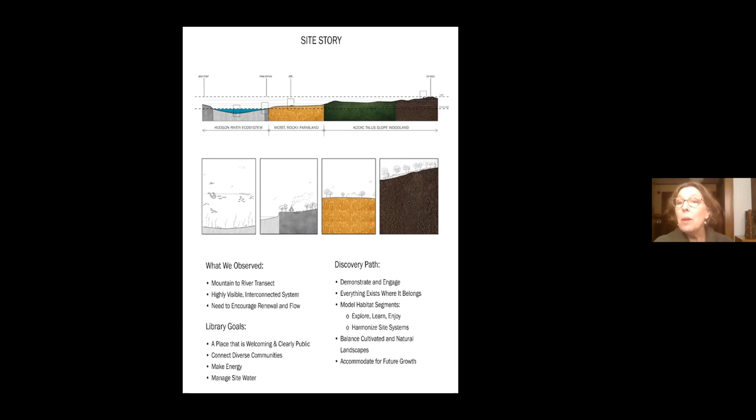To do that, we wanted to model habitat segments for learning and exploration and to harmonize site systems. We want to balance cultivated and natural landscapes and accommodate for future growth of the library, sometime down the road, though we don't know when that is.

To get to that final Discovery Path solution, as Jen mentioned, we ended up developing three concepts that we presented to the public at the final public meeting. The concepts worked around different ways to organize the program components, or the uses, on the site.

You'll see in these 3 diagrams, which I won't go into too deeply, that the same components—a solar array, a path around the site, moments to engage in outdoor activities—all find a different diagram or relationship in each of these proposals that we put out there.

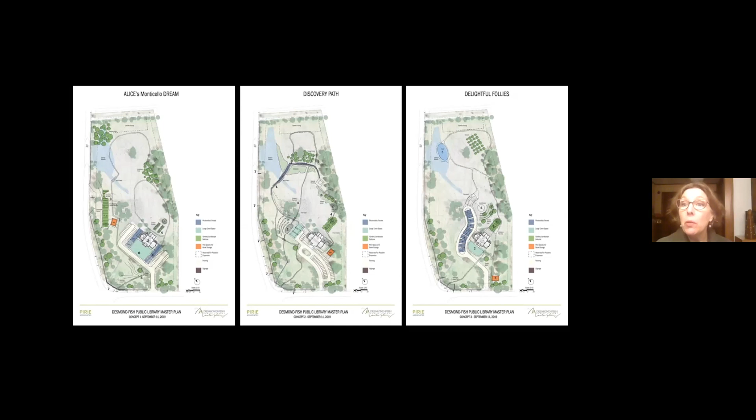It was a lot of fun to have the community members at the library evaluating and giving their opinions and input on the final schemes. Most of the people there that night had been there throughout the process, and they could see their ideas and suggestions from the previous two meetings come to life in the final propositions.

So we did ranking, evaluations and discussions, and people noted their favorite scheme with stars and numbers. With this public input in combination with the library's internal goals, we landed on the discovery path as the preferred solution. So here's the complete site plan.

As Jen mentioned, this is a master site plan, so it's looking to the future. It doesn't mean all of this is going to be implemented at one time. The purpose of a master plan is to look some distance out and anticipate where activities may happen, so that as incremental implementation occurs, we don't put something where we want something else, or put something in a place that precludes a better solution down the road. The idea of conceptualizing the entire site is not to build it at one point, but to make a proposition that can be implemented over time.

As we look at the entire site plan, it takes advantage of an emerging wetland up here in the northeasterly corner. Route 9D goes along this edge, and the building is in the center. As a result of the construction of 9D and other topographical characteristics, there's an emerging wetland on the site.

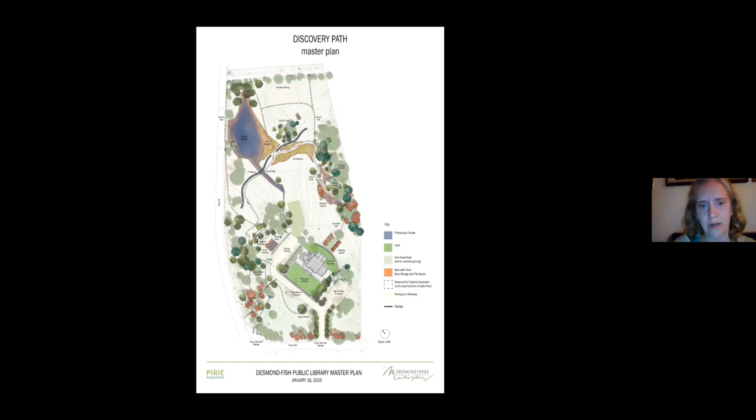Jen, I don't know if you want to speak to your meeting with the Conservation Board, as we're introducing the concept here. Yeah, we did meet with the Conservation Board—they came to visit the site and look at where the solar was proposed. They approved a permit for this project specifically, with the caveat that we plant some native plants to offset the work being done across that small section of the emergent wetlands. So we're planning to work with the Audubon Constitution Marsh folks to make recommendations for native plantings along that stream.

So the library is here, and the idea of the discovery path is that along the path—I'm marking the edge here with the cursor—throughout this kind of loop that would exist around the site, one could travel through different microhabitats around the site.

The first being a pollinator garden along this dense edge, which provides nice privacy to an adjacent neighbor, with small moments for stopping or reflection along the path. A dry meadow landscape uses grasses and other plants appropriate to that setting. There's an emerging young forest here to demonstrate tree succession—we want to show what a young forest looks like, what a mature forest looks like, and what a cycling forest looks like on the site.

Then as we cross along this area, the path moves near the wetland and merges into a wet meadow with a series of native plants and grasses found in that landscape. Around close to the front edge, it comes into a woodland landscape, and then back to a more cultivated landscape around the library building itself.

Behind the library building, there's a desire for a reading garden—a slightly more formal landscape configuration, like an outdoor reading room. So those components along the discovery path organize the entire site.

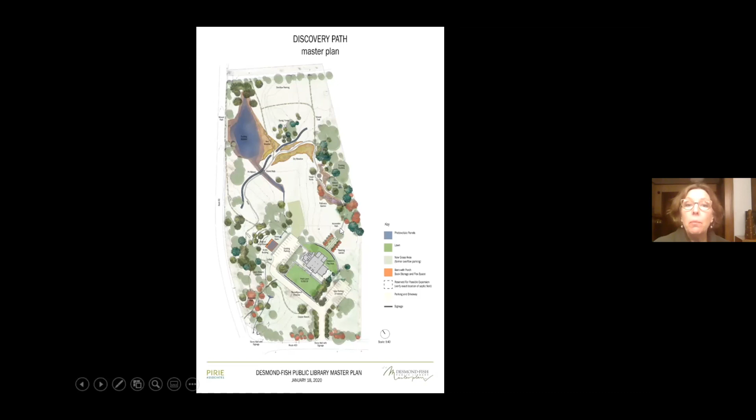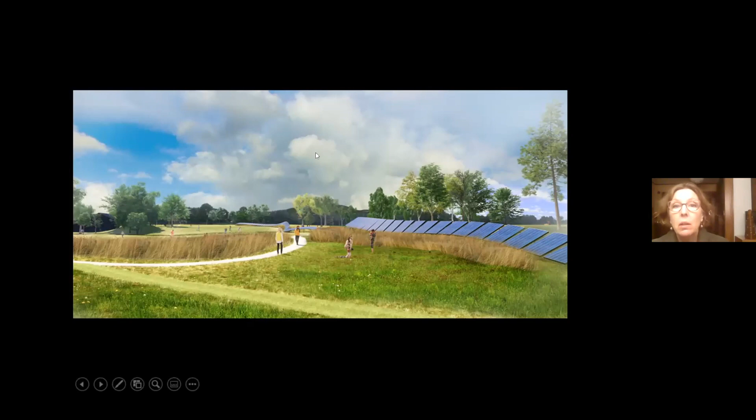So those are the three components: the reading garden, the discovery path, and the solar array that are part of this application. Here's an image we created, standing looking at this location as the path, the discovery path, bends around, and you can see the solar array to your right. So this is the discovery path bending around.

As I mentioned, it's a stone dust path on a supported subbase, about 3 feet wide, about 6 inches deep. These are the plantings of the natural grasses. Portions of them will be able to be grown long, and other parts of the lawn area that we know is open will be mown. You can see the beginning of the emerging young forest here.

The array floats lightly over the landscape, feeling like it's a ribbon blowing in the wind. We felt that was a delicate, light touch way to touch the ground, but also creates an artful and demonstrative form in the landscape. And if you look over to the left, you can see just beyond here is where the library would be, and here's the profile of the mountains across the river.

So focusing in on two of the three areas, the reading garden we spoke about quickly. This is the wetland landscape, so you can see a sketch of a similar view I just showed you, with the library in the background, the dry grasses, the wetland grasses around. This is the solar ribbon itself here. The path comes along the front of it. There's a small footbridge that goes across a wetland area, and the plantings in this area, on the whole site, are actually meant to be native plantings.

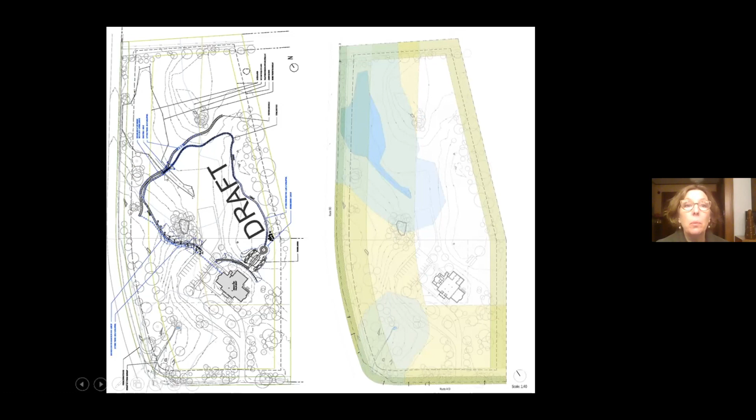From a practical level, as we know on this site, this toned line here represents the scenic protection overlay of the site. Here's the library building itself. There are several other setbacks noted here. This is an excerpt of the plan that was submitted, so we can see the plan here. This is that partial retaining wall along which the accessible grade path is set up. This is the reading garden itself. This is the final configuration of the discovery path at this time, a portion of it. And then here's the solar ribbon array at this point, and then the footbridge is here.

A few practical considerations: the area of disturbance of the project. Although it covers a large area, the actual area of disturbance for each portion of the project is fairly limited. The area of disturbance for the reading garden, behind the library, because we had to regrade it for accessibility and create planting beds, was 7,000 square feet of planting beds and garden elements, low retaining walls, benches, paths. The solar array itself, although the array takes up area on site, the disturbance for that is very limited because it's just the pile foundations that go down into the ground.

We're planning on piles every 8 to 10 feet. So the total area of disturbance for the solar array is about 2,500 to 2,600 square feet. And then the stone dust paths and the grading for the path end up disturbing about 4,250 in total.

So the total site disturbance area for the boardwalk, the dust paths, and the grading is about 7,500 square feet. The reading garden was underway and complete, except for a few plantings in 2020, and that was about 7,000 square feet. The solar array and the walk total to just under 8,000 square feet. The two add up to about 15,000 square feet. So you can see the total work anticipated for 2020 and the total work area in 2021, each of which is less than 10,000 square feet.

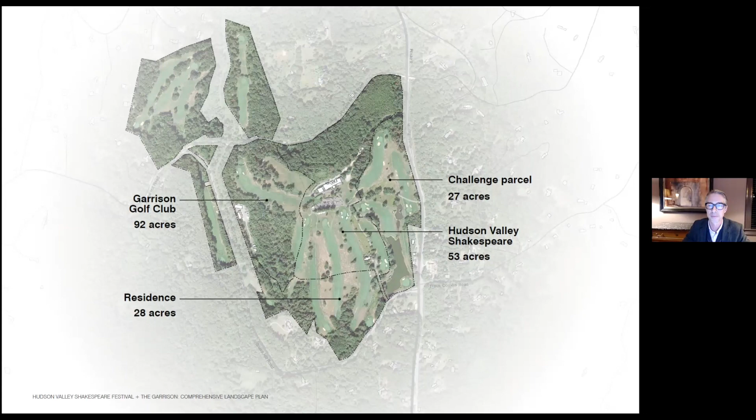I'll walk you through the plan as it has been developed over the past few months, and we'll begin off of Snake Hill Drive. I hope you can see my cursor. Just anybody, a thumb up if you can see my cursor on the lake. Thank you.

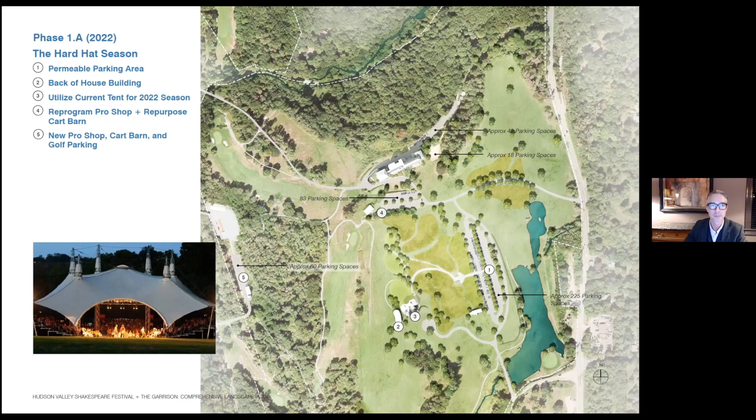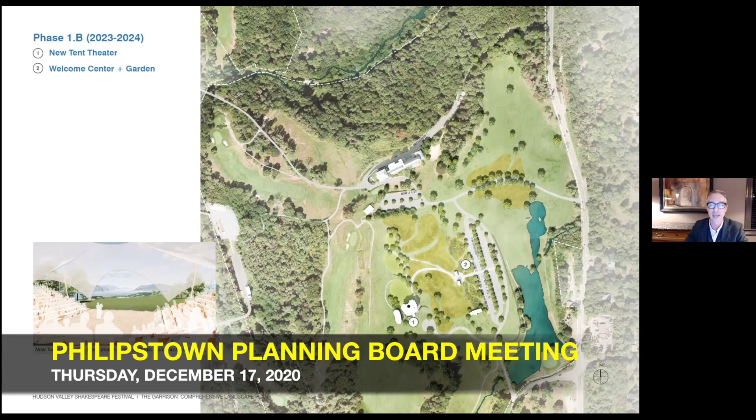Phase 1B would be the season of 2023 and 2024, and here is where the new tent designed by Studio Gang would be installed. This gatehouse structure, the welcome building or welcome center, would be built, and the welcome gardens would be complete. The existing cottage that is currently the residence for the director of the Garrison would be repurposed as administrative offices for the staff.

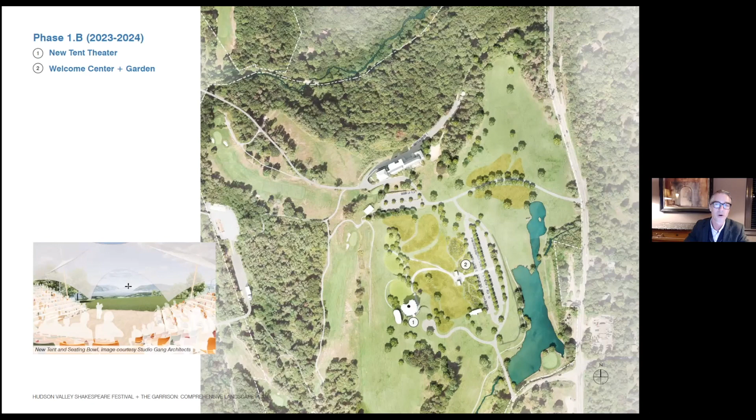Here you're seeing a rendering from Studio Gang of what the tent structure and the seating for approximately 525 people would be, focused on the view to the river.

The paths will be a mix of some hard paths for universal accessibility - for strollers, wheelchairs, people of all abilities - as well as mown paths through this warm season grass meadow, akin to the previous project at the library that you just reviewed, creating this immersion into the landscape of the Hudson Valley that is such an essential part of the magical theater experience of the Hudson Valley Shakespeare Festival.

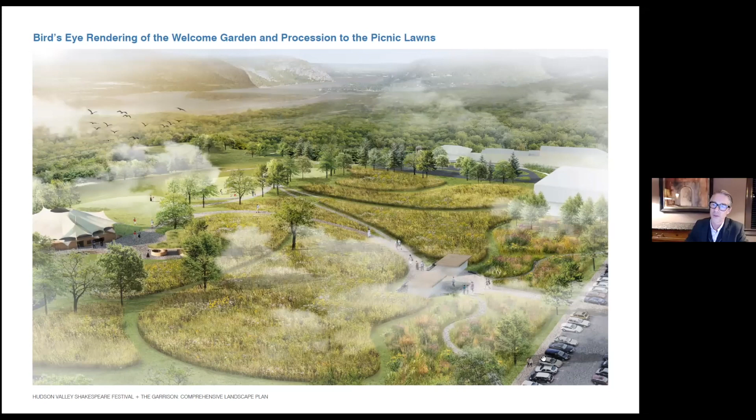This is a rendering showing the parking lot, the welcome garden here with strolling paths that all collect at the welcome building, this welcome center.

The two pavilions, perhaps - again, this is not designed and not in our first phase of construction, but I think the essential point is that this building be a welcoming threshold to your journey up the hill to the theater at the top. This is the eventual concession building with a green roof, and the back of house actors building is just to the left, off screen here, of the tent.

You can see the lawn areas we're imagining for picnicking, shade trees included, a second lawn, a very small retaining wall here that might be for pre-performance lectures where maybe some performers or the director might come and speak to the audience. And then a number of paths that create daily connectivity on this campus between the existing Garrison buildings, the eventual permanent year-round theater, and the administration.

This next visualization is looking up the three lawns toward the eventual tent, the shade trees, the rougher grasses, mown lawn in just these elliptical lawn areas, and then the open meadow in the distance. And then down at the bottom of this hill behind my cursor is where the parking lots would be.

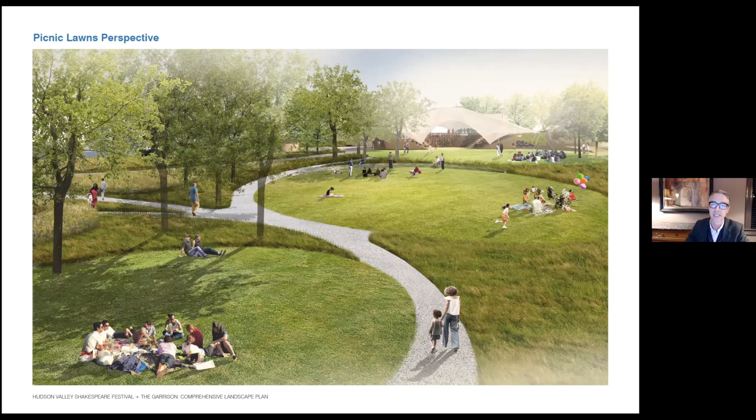This section we thought might be helpful. You can see in this cross section, this is going from the berm behind the theater that will help mitigate sound coming to the theater from the road and from the theater out to the road.

Here is the tent, the three picnic lawns, the parking lot that exists at the Garrison and down into the forest. So now going left to right, we have the existing ridge, the berm here, the surface of the tent, first lawn, second lawn, lower lawn, the meadow slope down to this outdoor community pavilion, and then the slope that exists to the reception hall at the Garrison, its service road behind, and then the hiking paths down in the rehabilitated woodland below.

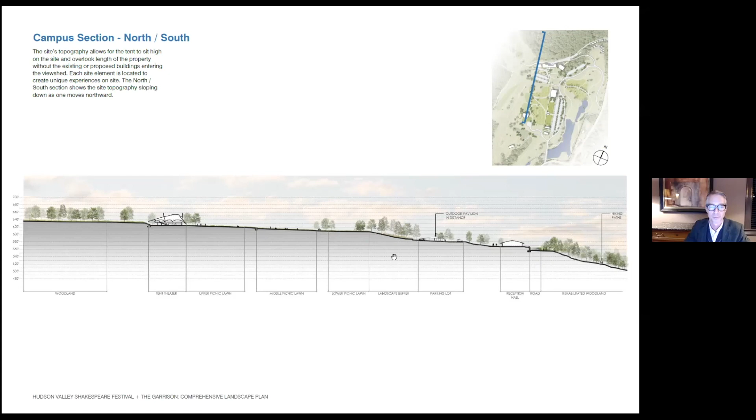So we're at a substantial distance. I mentioned before, 1,100 feet from the road.

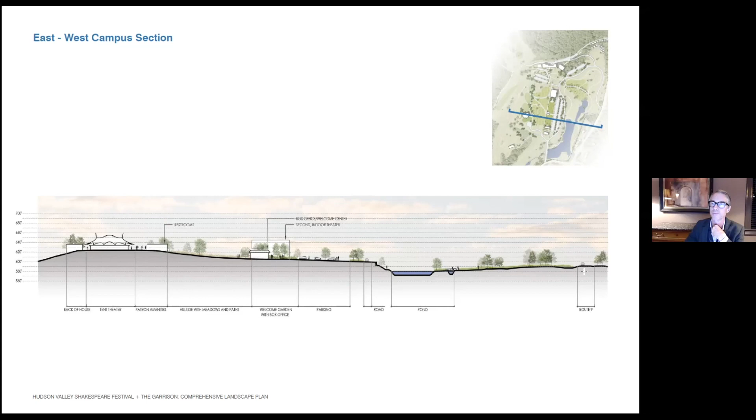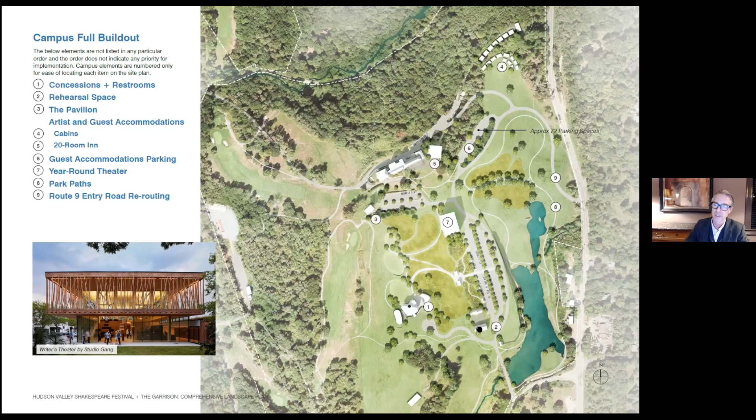In this, you're seeing the full build out that I walked you through at the beginning, but this is a chance to show you some of the ideas for one other structure that I neglected to mention, number 2, which is a proposed rehearsal structure parallel to the existing cottage that is the director's residence for the Garrison. Just south of it would be this rehearsal space.

And again, not designed yet, but the idea that it might be something like one of these kind of barn-like structures. Maybe it draws influence from agrarian structures or even the cottage itself that it would be next to, so that it really fits within the context.

And then for that community pavilion that I mentioned down near the existing hotel, a lightweight open air structure for outdoor education and community gathering.

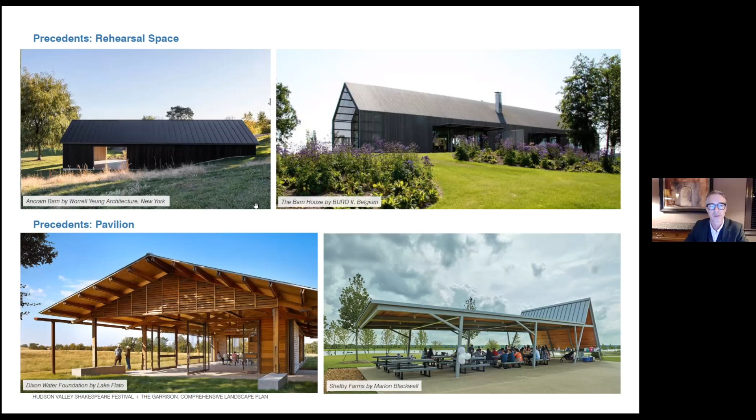So I will end there, and happy to field any questions anyone has. And Davis and Katie and Chris, if I missed anything, please add.

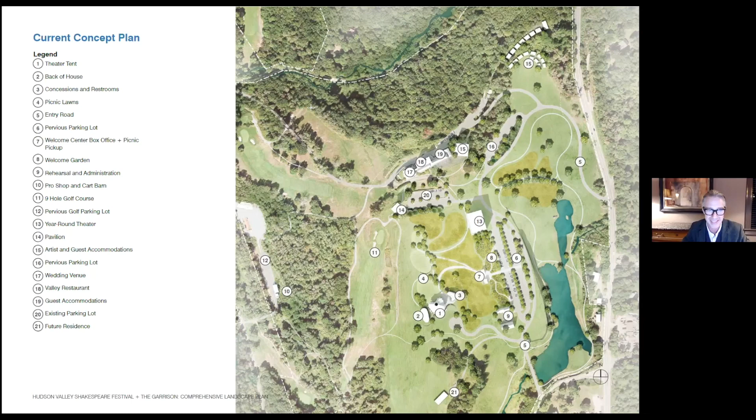Well, Thomas, before we go on, just so we know, we have many more activities to do tonight, and I'm going to ask Steve and Ron procedurally about how we handle questions this evening, both from the public and from the board, and whether we can even have a dedicated session to this topic, much like we did with Hudson Highlands Reserve, where we had a separate evening, I believe, a workshop to take community input. So we can talk about it in a second. I believe Glenn hasn't gone yet, though. So maybe we let Glenn do his thing as well.

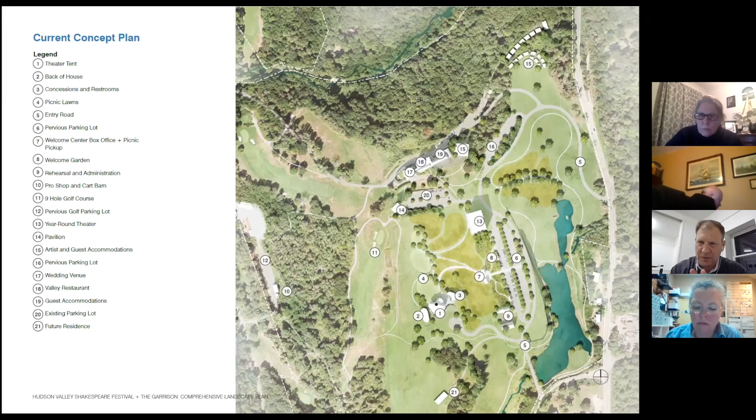Glenn, you're on mute. Okay, long red button, sorry.

I don't have an awful lot to say right now. You've gotten a pretty good overview of everything that's going on here. As I said to the town board when we met, we've had some very exciting projects, and this is right there at the top of them. You've all received Ron's memo, which gives you a history of the property, as well as walks you through the steps necessary to accomplish this, at least the regulatory steps in the different bodies. So I'm not going to say much else about that. I would ask if it might not be better to have Ron just give his couple of minutes, and then hand it off to Dan Hollis, who will actually make a request of what we would like to accomplish tonight. I'm sure Dan would only take a minute or so, and we could wrap it up.

Well, why don't we finish with the applicant going, and then we can have the staff talk. So if your colleague, Mr. Hollis, would like to speak, that's fine. Very good.

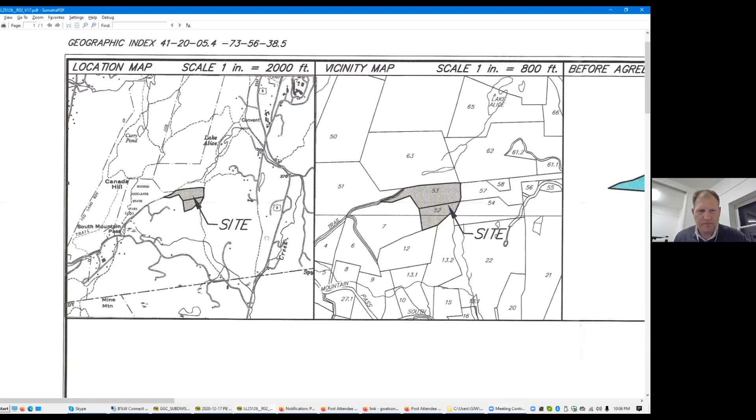I'm just going to walk you across the top of the map. On the left side, you see the location map. This dashed line that the cursor is following is the county line between Westchester and Putnam. To the right of this window, you have Route 9 going north and south. South Mountain Pass leaves Route 9 in Westchester and comes up over the mountain to South Mountain Pass Spur.

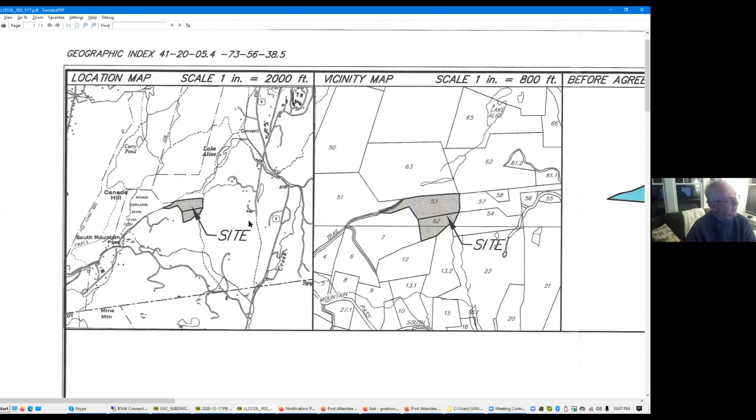It's a private road that services, at present, two lots that actually have improvements, and we have the property at the end of South Mountain Pass Spur. The next panel is the vicinity map, which is just a blow-up that shows the 2 lots that exist today at the end of South Mountain Pass Spur. Lot 53 is improved with 2 structures, 2 dwellings, and lot 52 is a vacant parcel.

The application is to take the 2 existing parcels, tax parcel 53, which has the 2 dwellings, and the vacant parcel, tax 52. The panel you're seeing now is their present configuration. Parcel 2 is a landlocked parcel recently acquired in the last couple of years. Parcel 1, the improved parcel, has been owned by the family since the early 1970s.

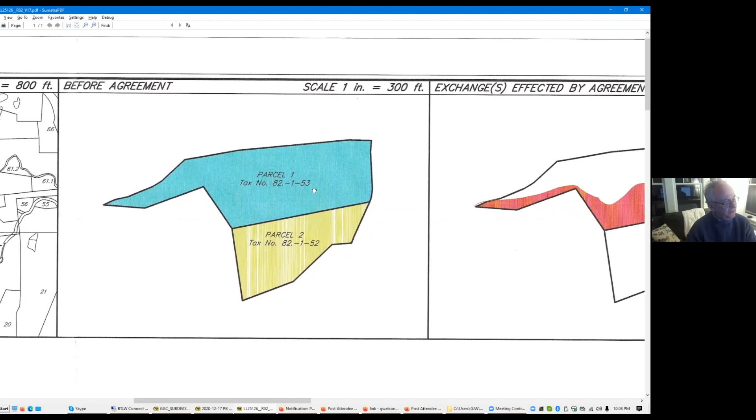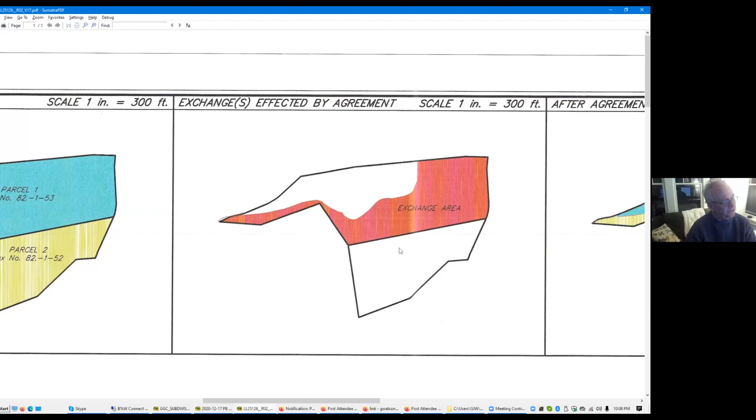The application seeks to adjust the lot line between the 2 lots such that this red area goes from being part of tax lot 53 and becomes merged with tax lot 52. That results in a configuration that looks like this. Sorry, I have to stop that.

We're in a 10-acre zone. We do not have 20 acres of ground, but we have 2 buildings. So we came before you a few months ago seeking this, and you turned us down, rightfully so, because we didn't have adequate area. There was no real practical way to configure the lots since we didn't have enough area to do it at all, and there was no way to strike any kind of balance.

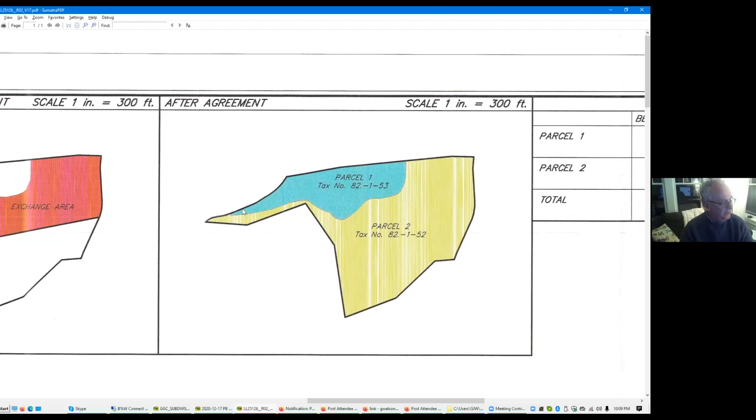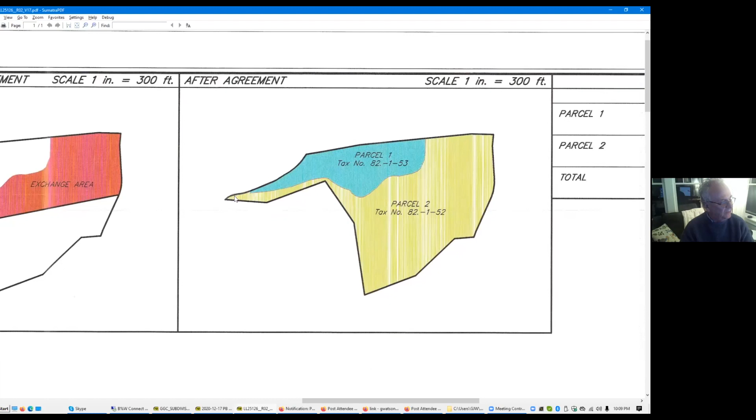But what we did do was adjust the line between the two existing houses, and provided some frontage for the second lot that today has no frontage. It created two nonconformities: one, the area of parcel 1 is now going to be less than 10 acres, getting smaller, so that was a nonconformity. And the frontage we'd be providing for lot 52 is substandard. That's the second nonconformity. You sent us off to the zoning board.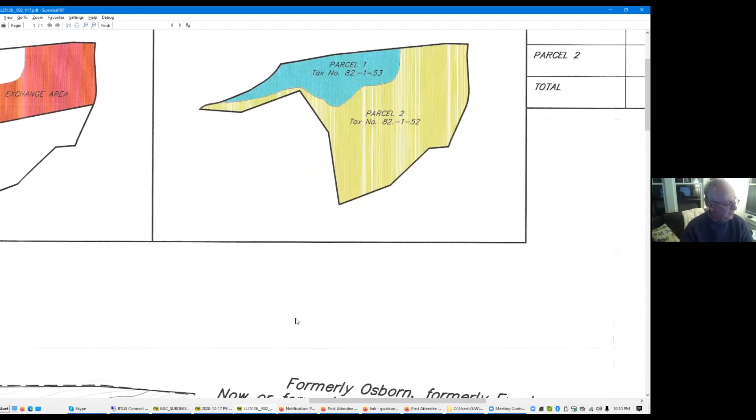The zoning board has granted us those variances, and now we have created... I'm going to try and make this go down a little bit. This is an overview of the property. This is the actual subdivision plat that you're looking at now.

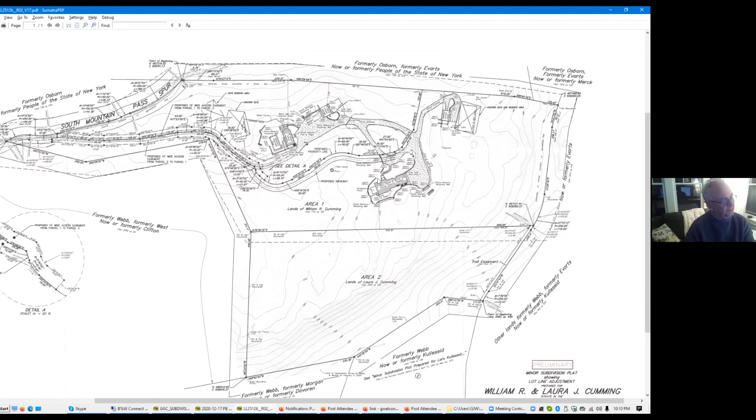So now what we did was take the division line, the proposed division line down the driveway, and then created an easement that they would share, and the two houses would branch off. Each house would be on a separate lot. Each house has its existing septic system. Each house has its existing well. We've accomplished as much as I think we can with regard to making the lots as conforming as possible.

And we did get the variances. I think we've given those to you. So now we're here seeking your approval to subdivide the properties as shown here. Okay, thank you, Glenn. Ron?

Yeah, the board has addressed all required procedural and referrals necessary. You're here tonight for the conduct of the public hearing, and that's the last statutory requirement you have prior to consideration of action on the application.

Okay, thank you. Steve, anything to add? Ron's correct, it's time to see what the public has to say. Okay, board members, questions? No? Okay, let's turn it over to the public. The public comment period begins. So please raise your hand so Kelly can let you in.

Oh, Ms. Cumming, do you want to say anything? Not at this point, okay. But happy to answer any questions. Great, Mr. Davoren, we see you. Why don't you, we got your email this morning, so I assume you want to ask your question. Go ahead sir, you're on mute.

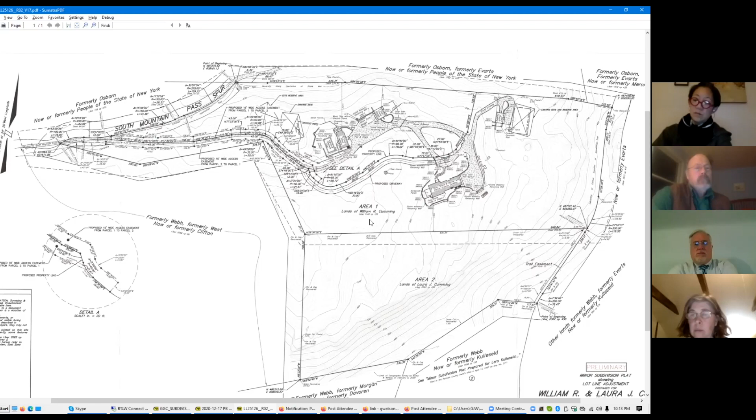The second question would be, if that were true, or if not, if it weren't true, is there any way to increase the number of lots on a common driveway through a variance of that regulation, to increase the number from 4 to something higher, because the road is so long and it has many lots on it. Is that something that we could potentially apply for after this subdivision goes through?

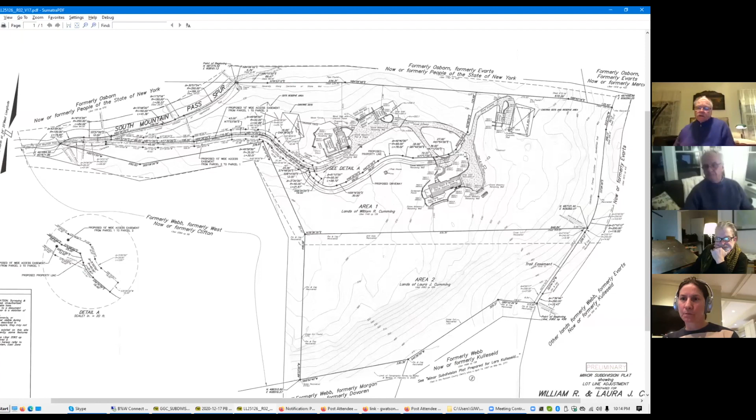So I'm going to go to Ron maybe on that one. Actually, the project itself is not changing the number of lots on the roadway at all. I mean, it's just a lot line adjustment. With respect to the permitted number of lots on the project, it actually comes back to the age of the roadway, when the road was created, and that I don't know. But that could be investigated separately if and when you ever seek to have development on your parcels.

Okay, so at that point we could apply for a variance to that regulation and do the investigation on the age of the road and the maintenance of the road, with the hope that maybe the variance to the regulation could increase the number of lots on a common driveway. Now again, the town code is such that depending on the age of when the road was originally created, it may permit additional lots without need of variance. But that investigation has to be accomplished.

It's only like up to 8 then, Ron, I believe. Right, exactly, it goes up to 8. May I address that? Sure. As Mr. Davoren points out, it's regulation, it's the land subdivision regulations, it's not the law. There's specific provision in the law for waivers to be granted to that 4-lot variance. It's happened several times over the course of my history in the town.

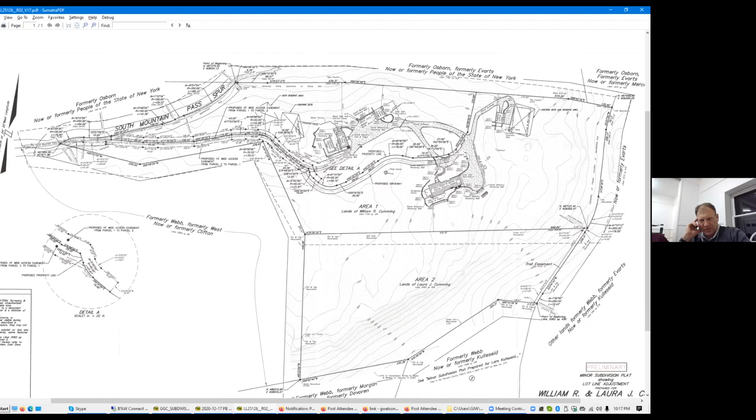All right, thanks Peter. Other questions, other comments from the public? Anyone else? Is this Mr. Clifton? Mrs. Clifton? Alex Clifton? Hello? Yes, please go ahead. I believe - I don't know if my parents are on here as well, they had wanted to ask a question. Do you see them on here? There's a Michelle Clifton on. Yes, okay, so Ms. Clifton, go ahead.

Well, just to say that I shared a similar concern to Peter Davoren, and I just wanted to say congrats to the Cummings, they've been great neighbors for a long time, and the fact that they're looking to do this subdivision for their children I think is wonderful. It made me think about the fact that we have our property up here as well, and the thought that in the future we may want to subdivide and give it to our children in a similar way. We just wanted to know if this would impact our ability to do that. We're on approximately 25 acres, and it's 10-acre zoning, so I think there's nothing that would stop us there. It was just a similar question to Mr. Davoren's, and I think my mother has a similar question. Thank you very much.

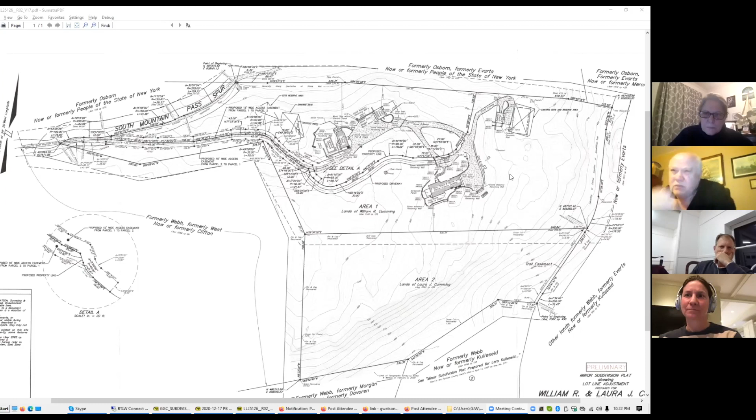Hi Michelle, it's Laura. Hi Laura, thank you. And the other question that I still don't quite understand is, if this was a property that was all one and now is being subdivided, does it stay as one on this road, or does it now take up 2 of the 4 positions available on the private road?

I think it's important for you to understand that this is not a subdivision, although it's processed as a subdivision. Hello? Keep going Steve, she's on mute because she's got some sort of echo going. Oh okay, I can't hear myself talk, so I thought I was on mute as well.

Anyway, the point is that there are 2 lots now. After this application is approved, there will still be 2 lots - they're not creating a new lot. They're just changing the boundary line between the 2 lots. So that's different than a subdivision - it would not result in an additional lot on the private roadway.

Thank you very much for the answers to our questions, and thank you for all your service to our town. Thank you, Mr. Clifton, Mrs. Clifton. Any other public comments?

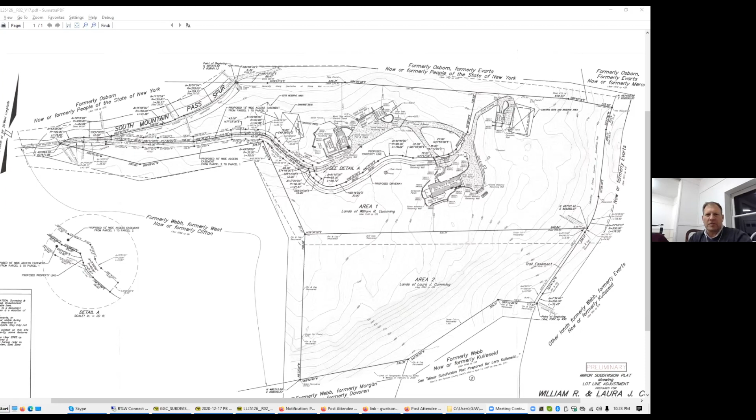Do we see anybody else, Kel? Did I lose Kelly? We have lost Kelly. Oh, there you are, Kelly. Anyone else who's raised their hand? Nobody else has raised their hand. All right, good.

Can I have a motion to close the public hearing then? Kim's motion, Peter second. All in favor, say aye. Aye. Opposed, and abstentions. Okay, thank you very much.

I do think it's valuable to state that the conversation we just had does not provide any opinion about future projects that may be applied for on that road. We're talking about this particular application right now, the Cummings. So I just want to be clear about that.

So I think we can direct Ron to provide the documentation for our next meeting to approve, if we so choose. You're on mute, Ron. I didn't realize you were waiting for me. Sure, that would be the next step in this process for the board to take that action.

Board comfortable with that? Can I have a motion to direct Ron to provide the appropriate resolutions? Thank you, Kim, for our next meeting to be signed. Okay, got double thumbs up from Kim. A second? Second. Okay, all in favor, say aye. Aye. Opposed and abstentions. All right, thank you, Ms. Cumming. Good luck. We'll see you next time to vote formally.

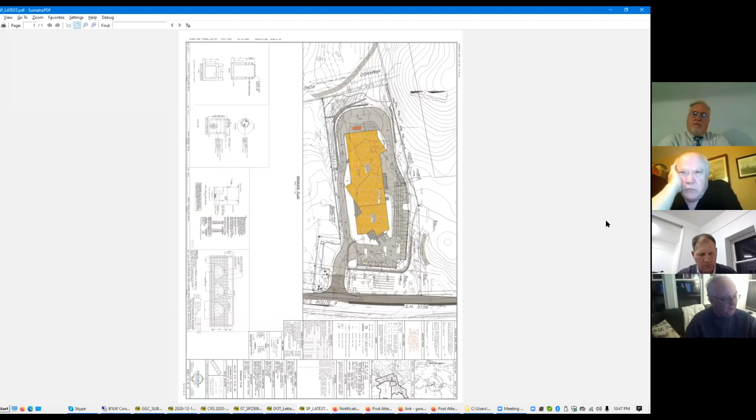The difficulty with the other site is that there's just not maneuvering room. Here we're providing the maneuvering room. So once we get off the road, we could stack far more trucks than is going to be coming into this facility. I think that should be evident, to be perfectly blunt about it.

We did look at the 2 options that DOT gave us with regard to the throat, to the entry, and there were 2 different versions. The first one that they wanted, and frankly it was their preferred version, we couldn't make work, but we did make the second one work. So we've responded to DOT in that regard.

And the last thing I'll say before I ask John to just talk about that, and I'll come back about landscaping when he's done.

Oh, I should say, with regard to the noise, we would certainly be able to post a couple of signs around the route of the trucks that said, turn your engine off, do not idle. If you wanted that, that's not an issue.

And my last point is that your normal practice, and the practice for an awfully long time, has been that your approval is subject to acquiring the DOT permit. And now we're going to have to get a DO - you're talking about reversing that. And frankly, I just don't think it's justified with all the work we've done. John, if you could take over.

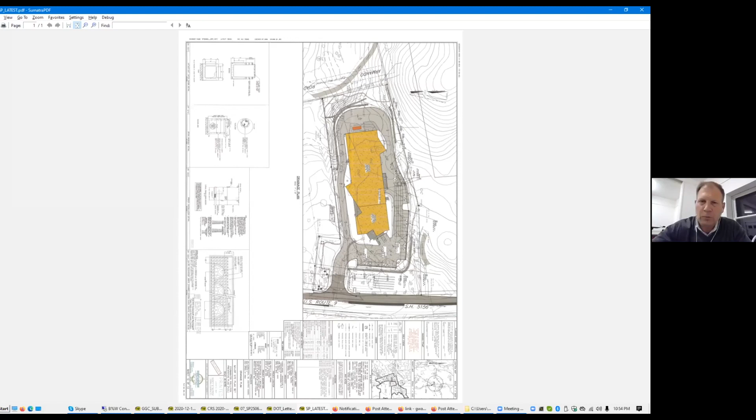So Glenn, before you go, I wanted to get the sentiment of my colleagues, and I'm going to go one by one. I'll start with Connor. So we're back to alphabetical order. Is that something people would like to see done first before we make a decision? I'm sorry, say that again? Do you want to wait for DOT input? Yes, before. Yes. Okay, Mr. Gagnon.

I'd like to get something from DOT. Mr. Lewis? I'd like to wait for it too, but DOT has a reputation of never responding to things. Maybe we should set a date. Is it possible, if DOT doesn't respond, to simply widen the mouth to 33? How long do we have to wait for those people to act?

That's not really a question for me. The point is, we wouldn't be able to have you sign any site plan unless we had that permit. So to extend the mouth, you'd have to have the permit. I know, but what I'm hearing is the sentiment of this board is that the width would provide more comfort for the operation, and with denial of the width, the board would like to think about other mitigations.

Laura? Yeah, I would like to wait as well. Heidi? Me too, yes. All right, oh sorry Neil, I apologize.

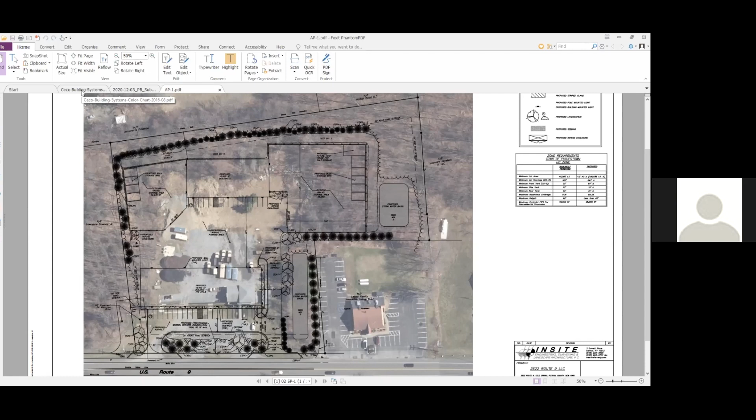And then finally, the last of the highlights since the last meeting: we've started to look at the building materials and architecture. The applicant is working with a designer on that to come up with elevations and other things. But in the meantime, we wanted to give a quick flavor of the material and color scheme being considered. This is for the use as contractor storage and office.

So this would likely be a metal building. There's also opportunities for a different kind of exterior finish, essentially an insulated foam that allows for different types of finishes on the outside. But we're primarily looking at this kind of metal type building.

Again, we're leaning into the direction of earth tones, maybe greens for a trim or something along those lines, to allow it to blend into the landscape. But those designs are in the process of being worked on now, and we'll have more detail going forward. Just to give you a sense of that.

And those are kind of the highlights, and I can get into other questions if the board has any. Ron? I guess for me, I just wonder, when will building architecturals be available?

We should be able to provide some elevations for the next meeting. So it's also a question of what specifically you're looking for. Are we specifically looking for detailed elevations? Are we looking for floor plans? How...

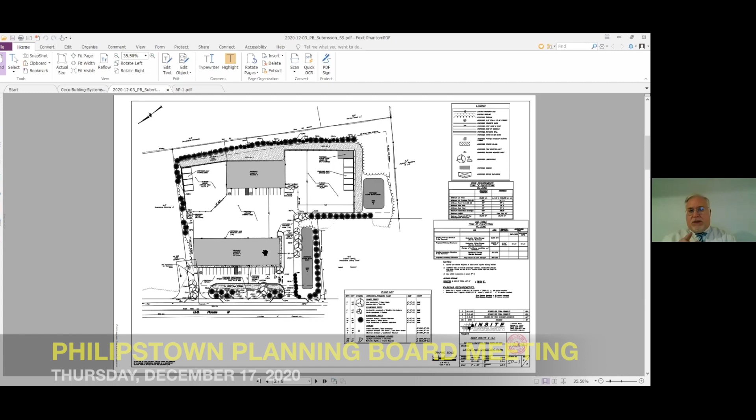Steve, I think you're looking at potential significant changes to this plan. We're talking about moving the parking spaces, among other things. I really think, look, it's the board's decision, as Ron rightly says. But given the way the board's treated applications like this in the past, you're probably going to want to see a further submission before you schedule. I think that's fair.

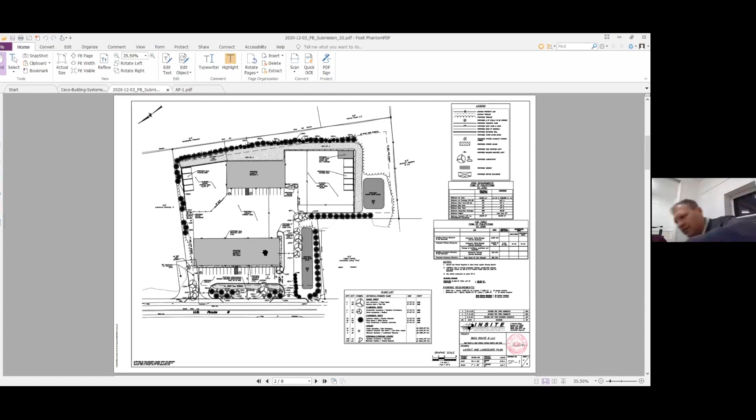Board questions? From the board? I have a question. Go ahead, Kim. Can you hear me? Yes. Okay.

So I'm trying to understand how only 59.3% of this lot is impervious surface. I'm trying to understand what counts as impervious surface and what doesn't, because it seems to me this lot is, as we've talked about paving and things like that in the past, those are impervious surfaces.

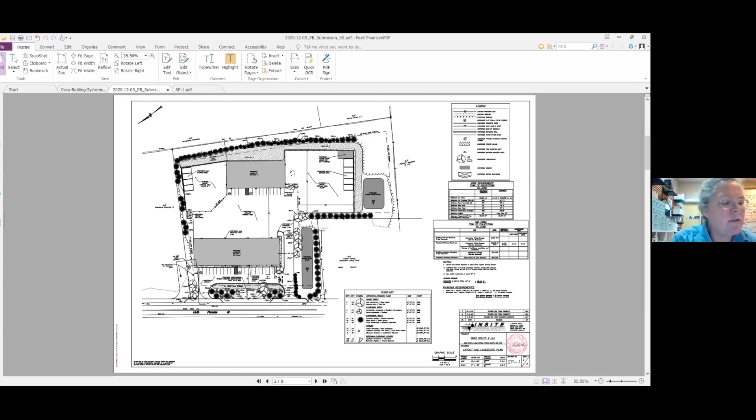The second question is for storage. It says in the code that outside storage on properties in the highway, commercial, or HC district should not exceed 20% of the lot area located in the district. Now, I don't know if the outside storage you have marked here is more than 20%, but it looks pretty big.

And then the third question has to do with this stormwater basin. I'd really like to know what that's going to look like. Is it going to be a big pit full of riprap? I'd like some detail, actually, because it's very large, and I'd just like to know what it is.

And additionally, we'd like to be sure that the trees you're planting will screen everything within 5 years. And then there's also the requirement about screening for outside storage not exceeding the height of that storage. So those are my questions.

Okay, let me try and take those in order. I don't know if I wrote them down in order, but I'll hit on all of those. In regard to the outdoor storage, yes, this is under the 20% threshold. We're at about 39,000 square feet of storage, which is a bit under 20% of the total lot area. So we do meet that requirement.

Then in regard to the height, we are showing screening to the adjacent properties. These are specified to go in at 8 to 10 feet. These are mostly spruces, which grow pretty quickly, so you'll pick up a foot or so a year. So yes, these will fill in nicely, and will be tall trees at maturity.

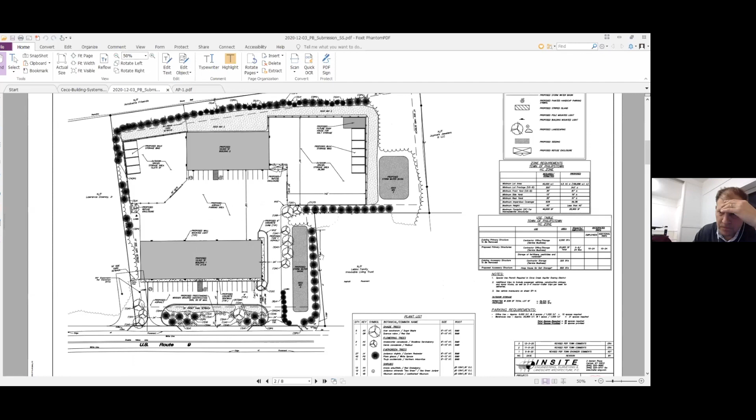All right, so it's very late. It sounds like the applicant's going to do another turn and get back to us in January. Is that correct? Yeah, I mean...

I would seek just a little bit more guidance, maybe from the board, on the level of interest in seeing these parking spaces move. We've shown more than the required landscape buffer. We're happy to move them, but it wasn't something that was in the plans until that suggestion was just made, and it's something we could certainly look at, but just maybe a little bit more input on what exactly you'd be looking for in regard to that.

I think it sounds like it was a suggestion Ron had. It might be worthwhile to see it. Clearly, our code does ask for as much screening as possible for non-retail businesses. So I don't know, other thoughts on this?

Peter asked: if we were to move the parking to the back side of the building, would that mean the truck loading would move to the front? No, no, no. We could actually move the parking to the back and still maintain the integrity of the front.

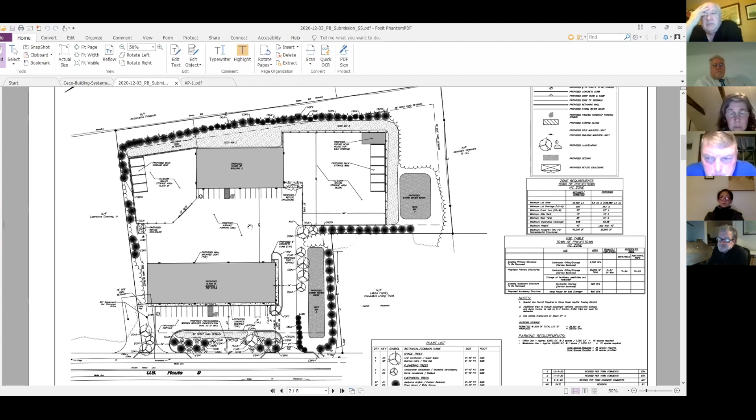Okay, Heidi, are you off mute? Heidi, you have a question? Yeah, I just wanted to follow up on a question Kim had at the site visit — it might be answered on the plan, but I can't see the writing too well. I know Kim had asked whether in the area where the salt and other chemicals are being stored, originally the hoop house area, whether that could have an impermeable floor to make sure that's happening now.

Yes, that would be on a concrete slab. That's a requirement of your code. Okay, I thought there was an issue that the area where the chemicals were being stored did not seem particularly — so I just want to clarify the language.

So the hoop house that we've shown as a potential future installation would essentially be the enclosure that could potentially be used, not necessarily, but could potentially be used for salt storage for such a contractor doing what we're seeing a lot of today. Any of the chemical storage, herbicides, pesticides and the like, that a landscape contractor might need to store, would be stored internal to the buildings with storage practices that meet whatever regulations are required. So those items would not be stored outside. The rest of the storage in this area would be for typical construction materials, stone, things like that.

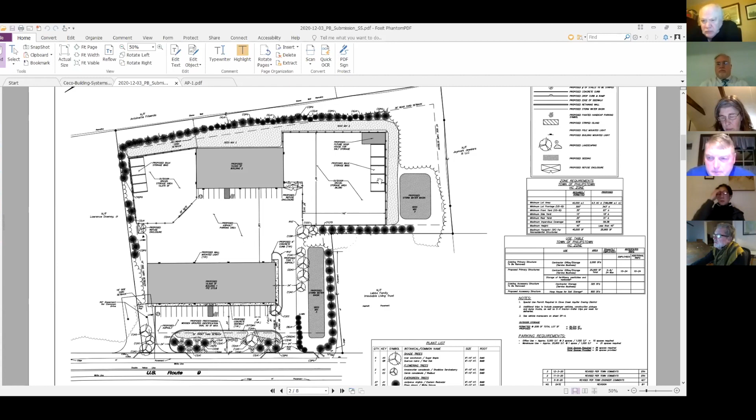Mr. Thyber, do you have what you need? Yeah, I think so. I may want to reach out to Mr. Gaynor if that is permissible. Absolutely, in the interim. Your applicant is paying fees for access to Ron, et cetera. Ron or Steve, other things you want to add? No, I think it's pretty straightforward at this point. We'll take it up in January.